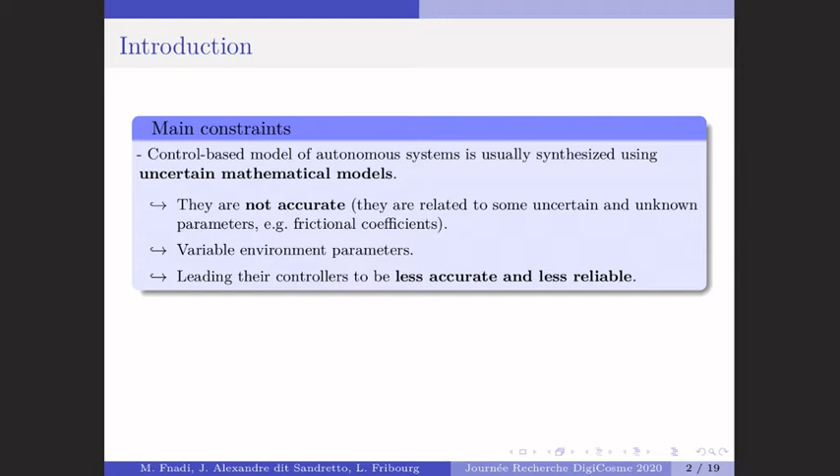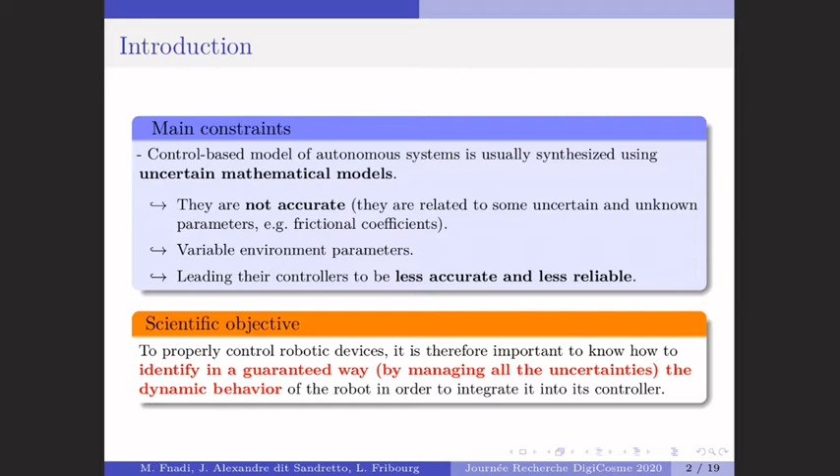So to overcome these issues, this is the purpose of my presentation today. It is important to know how to identify the dynamic model in a guaranteed way. When I say guaranteed way, it means we have to identify them as intervals instead of constant values. And once these parameters are identified, we have to use them in the control of the robots in order to achieve high accuracy and high stability of the controllers.

So in order to introduce the motivations of the postdoc project, I think this diagram can be more meaningful. Here we are interested in these two blocks, the control block of the robotic device, and the identification and observation block. The first topic that we are interested in is that we need an accurate model that requires a guaranteed identification of the parameters, mainly the dynamic parameters of the model.

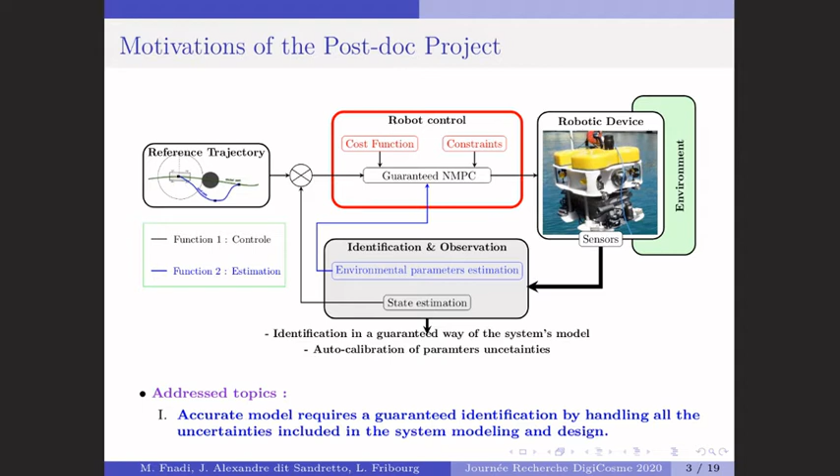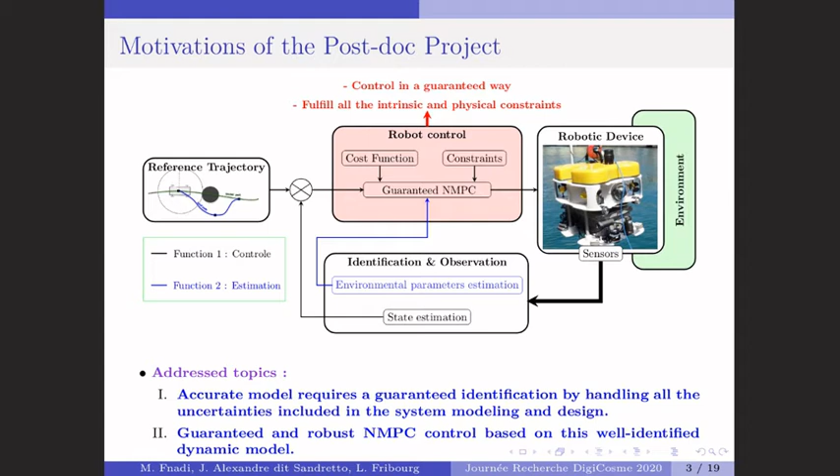These parameters are identified taking into account all the uncertainties coming from the system and the modeling as well, including the noises of the embedded sensors of the system. Once these parameters are identified, the second topic that we are interested in is the control of the robotic device. We will use mainly the parameters identified in a guaranteed way to develop a robust and guaranteed nonlinear model predictive control that optimizes some cost functions to ensure the path tracking task and to handle all the constraints of the system. So these are the main topics of this postdoc.

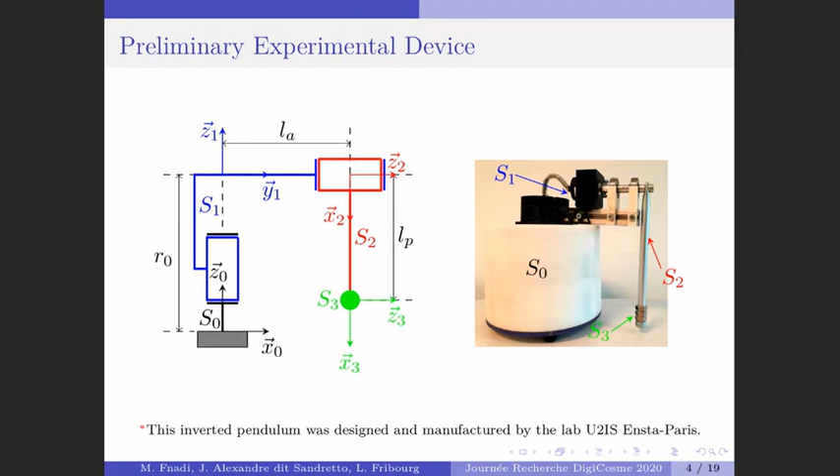So I will just introduce the experimental device. All our methods will be validated using this system, which is a simple system. It is an inverted pendulum that we have designed and manufactured in our lab. This device is equipped with a DC motor or a brushless motor to actuate the first joint, and the second joint is a passive one. And we have two encoders to measure the angle of the rotative arm and the angle of the pendulum arm. The purpose of this project is to stabilize the pendulum arm in the upright position.

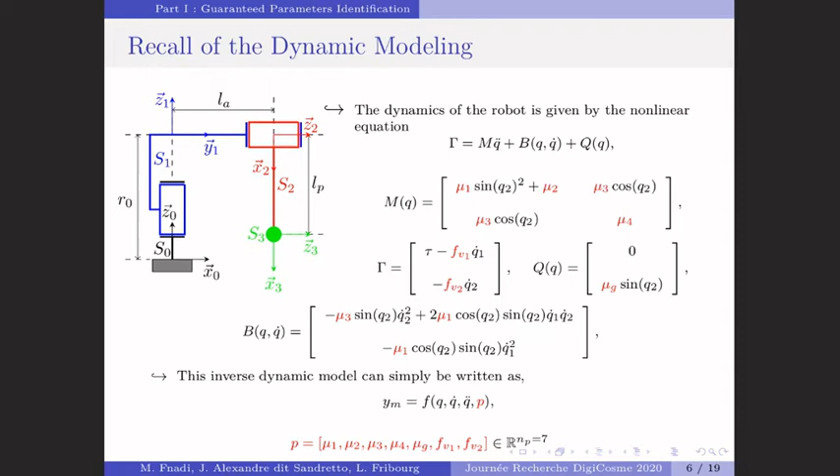So this model can be written simply by this equation, and we can notice that the inverse dynamic model can be written in a linear way according to the needed parameters. These are the parameters that we have to identify in a guaranteed way in order to achieve high accuracy and high stability of the controller.

In the first time, we have applied a traditional least square method in order to identify them. It's commonly used in robotics. So this method is based mainly on the optimization of the output, measured output and estimated output, to estimate the parameters in

a deterministic way. So here we generate some excitation trajectories in open loop that we will apply to the robot, and we can measure in real time all the parameters. So we can measure the position of the joints, and then we apply some sampling and derivative filters to compute the velocity and the acceleration of the joints.

On the other hand, we can use the inverse dynamic model to estimate the torque applied by the DC motor, and then we can generate what we call the observability matrix at each time step. And on the other hand, we can also apply this mechanical relationship that is given by the motor constructor to calculate the torque applied by the DC motor.

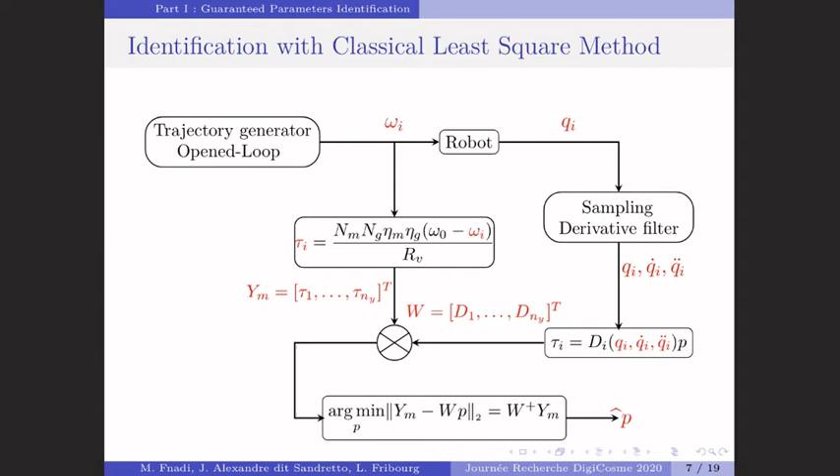So the purpose here is to optimize the error between this estimated vector and this computed vector to get the identified parameters. Nevertheless, the quality of the identification by this kind of approaches cannot be ensured. That's why a guaranteed identification using interval analysis and set inversion methods is required to reach high accuracy and high

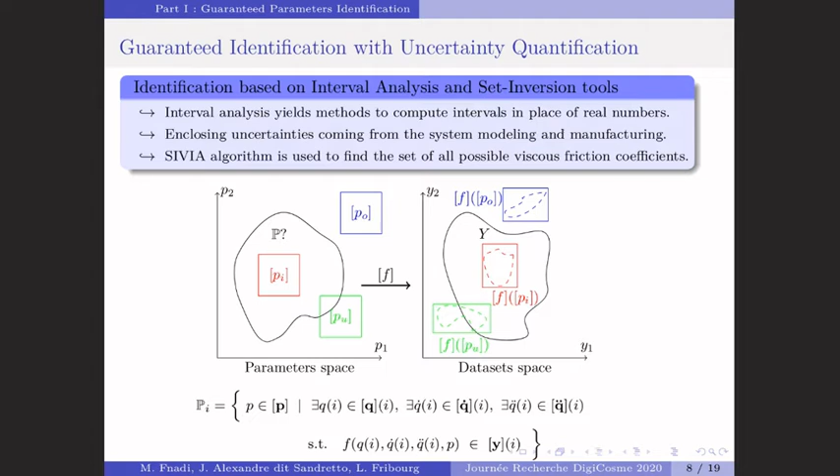And we have the undetermined ones, which are neither outside nor inside, or what we call also penumbra. And in this case, we have to bisect them in order to get small subpavings until achieving the accuracy of the SIVIA algorithm.

So this kind of problem is a set inversion problem. And the feasible parameters can be calculated by computing the reciprocal image of the output boxes that must be intersected with the initial interval of parameters, as can be seen by this equation.

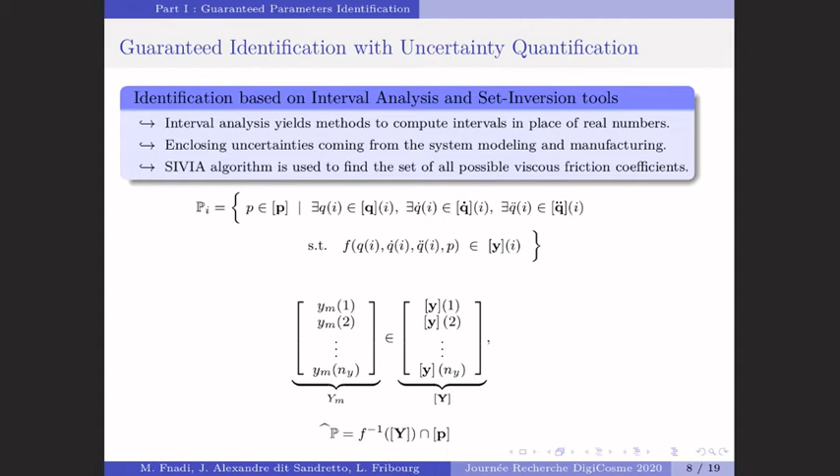Okay, so now I will introduce some results of this guaranteed identification. So we have implemented a bench strategy using the inverted pendulum to validate our identification approach. We have tested two exciting trajectories. So the first figure is the first trajectory. Here we have the angular positions that we have recorded using the inverted pendulum, and the second figure is the second trajectory. As can be seen, all the data are recorded as intervals by adding a bounded error to

each collected data. So in the table, we have the results using the least square method. So the first data are the identified data using the first trajectory, and the second are the data identified using the second trajectory. On the other hand, we can also use the CAD software. So here we use SolidWorks to deduce some geometric and inertial parameters. And we can notice that these parameters are much closer to the identified ones.

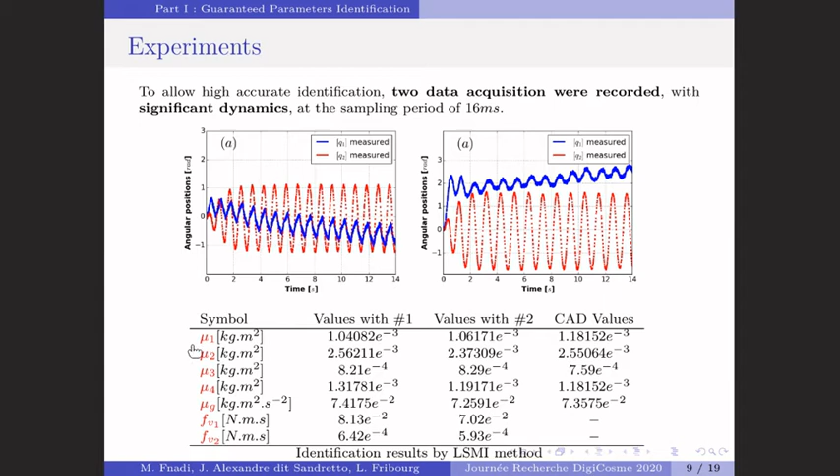And on the other hand, we have computed the mean value of each parameter, and we have quantified the uncertainties related to these 5 inertial parameters, as can be summarized by this table. Yes. So here we have the mean value of each parameter, and we have quantified the uncertainties of each one.

And on that perspective, we have applied the SIVIA algorithm, and we generate these subpavings. So the left one is the subpavings generated by the first trajectory, and the second one is the subpavings generated by the second trajectory. So the blue one is the unfeasible, the yellow one is the undetermined, and the red ones, the feasible ones.

So as can be seen, from these subpavings we can deduce this standard and common box, so the first interval is the interval of the first viscous friction parameter of the first joint, and the second one is for the second viscous parameter of the second joint.

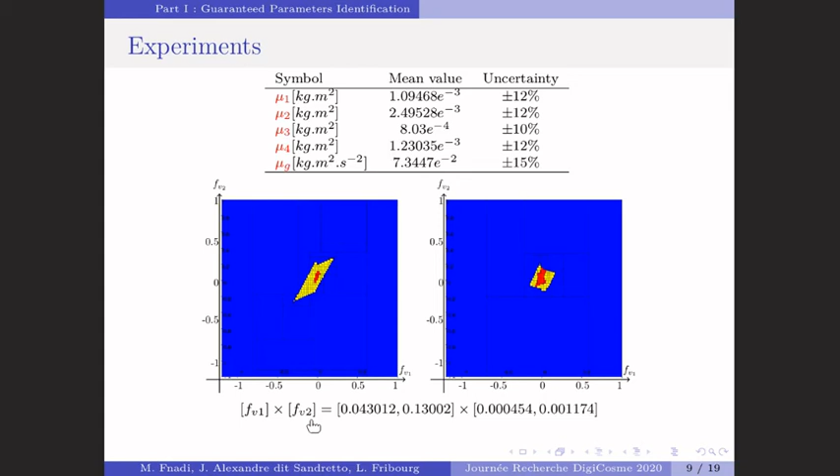So in order to show the effectiveness of our identification approach, we will apply first the cross-validation method, which is very used in robotics. And it is simple because here we compare just the measured torque with the estimated ones. So the measured one using the real system and the estimated ones using the identified parameters with the least square method and with the SIVIA parameters. And we can notice that they are similar and close. All the curves are close between them.

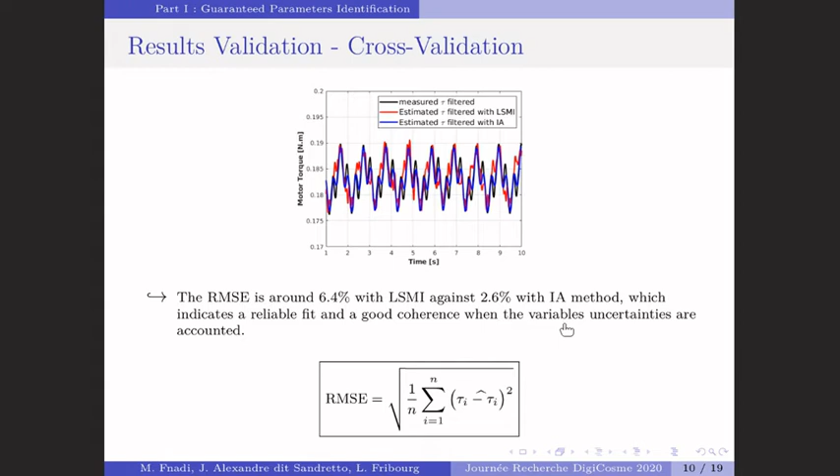And to evaluate this, we can calculate what we call the root mean square error, which is calculated by this formula. And this is around 6% with the least square parameters against 2% with the SIVIA parameters, which indicates a good fit and a good coherence when the uncertainties of the system are accounted.

On the other hand, in order also to evaluate the identification approach, we can solve this kind of ODE, the ordinary differential equation. So our dynamic model can be written as a direct dynamic model by this high order ordinary differential equation with respect to these initial conditions. So here we have the state and the initial state which belongs to this box, and we have also the initial input which belongs to this box.

So since the function f is Lipschitz and continuous in state and input, this ODE admits a unique solution at each time step. And in order to solve this ODE, we can use the DynIBEX library. I will explain the principle of DynIBEX. So DynIBEX allows us to compute the solution of this equation as boxes.

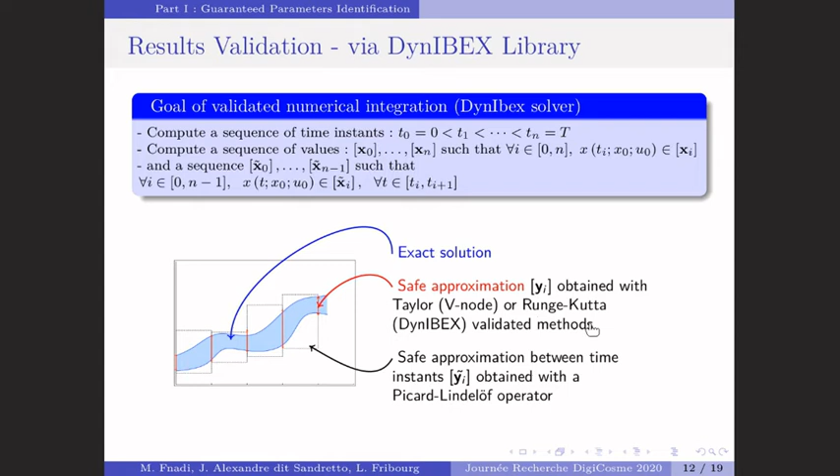So here we have the sequence of time instants as inputs, and we have also the sequence of the state. For each state variable, we can get the interval of inclusion. And this approach is based mainly on the Runge-Kutta schemes, which are powerful numerical integration methods. And we use this to solve our direct dynamic model, and we got these results.

So we did these tests for many scenarios. I will show you just two scenarios. So this one is the guaranteed simulation using these initial conditions, and the second one is with these other initial conditions. So here we compare the measurements using the real system with the simulated ones using the least square parameters and the SIVIA parameters. So as we can see, the measurements of the real system are very close to the simulated model.

And to evaluate this, we can use what we call coverage rates that can be calculated using this formula, where Nq is the number of times when the measured data is included in the simulated boxes. And this test is very draconian, and it's not easy to evaluate because of the timing lag and the synchronization between the simulation and the experiments. This explains the small percentages of inclusion between the simulation and the experiments.

Nevertheless, we can see that the percentages are more important when the SIVIA parameters are used compared with the least square parameters. And this is due to the fact that all the SIVIA parameters are considered as intervals instead of real numbers.

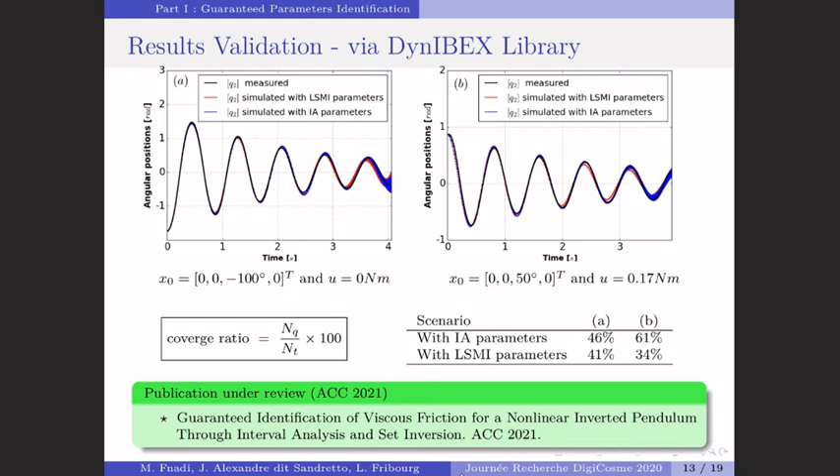So now I will present the second part, which is based on the first part. I will use the guaranteed identified parameters to develop my guaranteed nonlinear model predictive control. So nonlinear model predictive control is a very powerful technique that is commonly used in robotics and also in chemical processes because of its ability to handle constraints and also to anticipate future changes in set point and in reference trajectory.

So the principle here of the NMPC is to predict the dynamic behavior of the system along the prediction horizon. So the prediction horizon is the number of sampling times of the control signal multiplied by the sampling period of this signal.

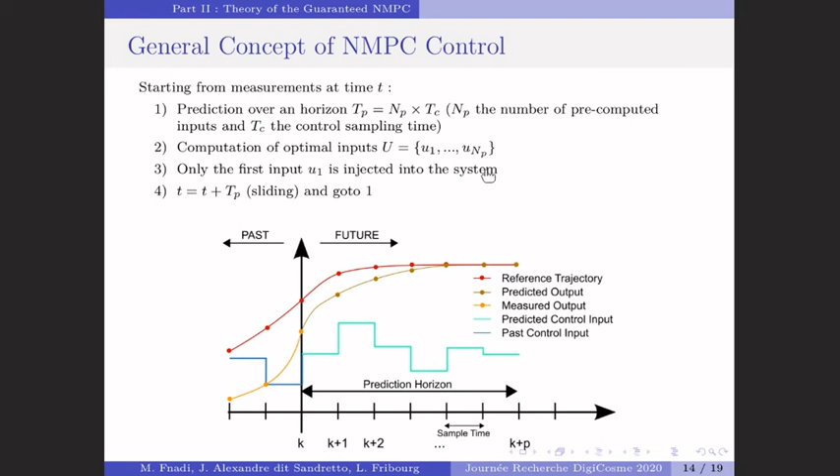And the purpose here is to compute the optimal inputs at each time step. And then we inject the first input into the system, that is optimal and smooth and respects all the constraints of the system. So the NMPC approach is based mainly on the optimization problem that minimizes some cost function that can be expressed carefully and that respects the system constraints, mainly the input saturations and also the state limits.

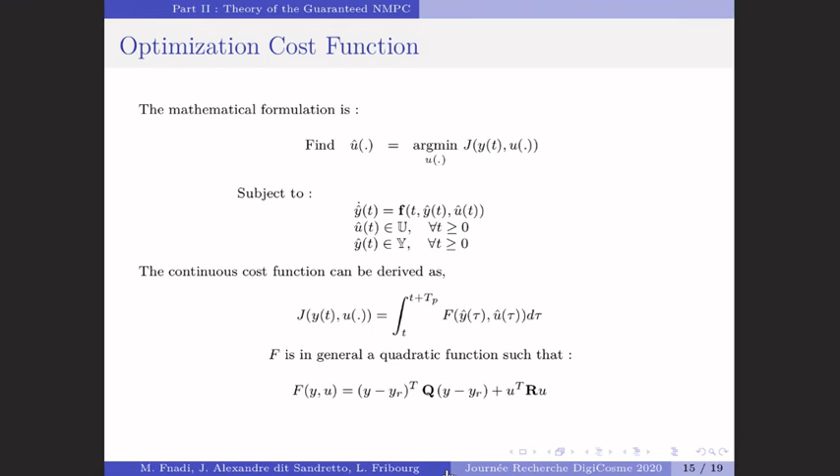Okay, so the continuous cost function can be expressed using this integral along the prediction horizon of this quadratic form that minimizes the norm of the difference between the predicted output and the reference output, and also the norm of the input vector, taking into account the weighting matrices Q and R that must be adjusted adequately. So in order to use the numerical simulation, we have to express this cost function in a discrete form.

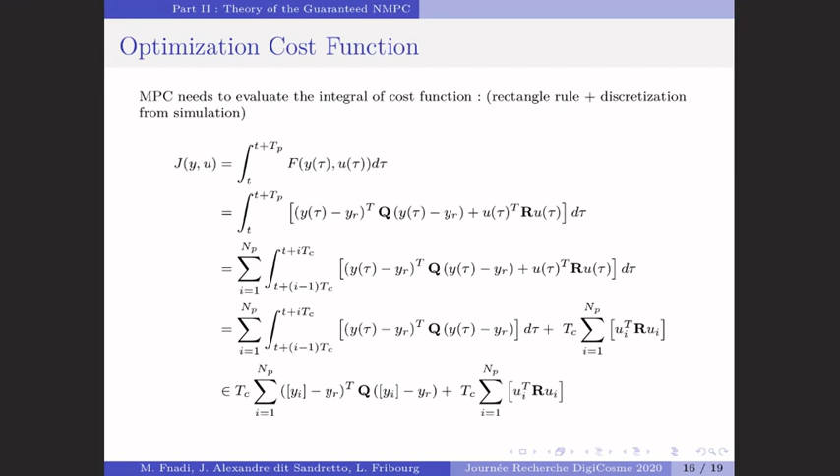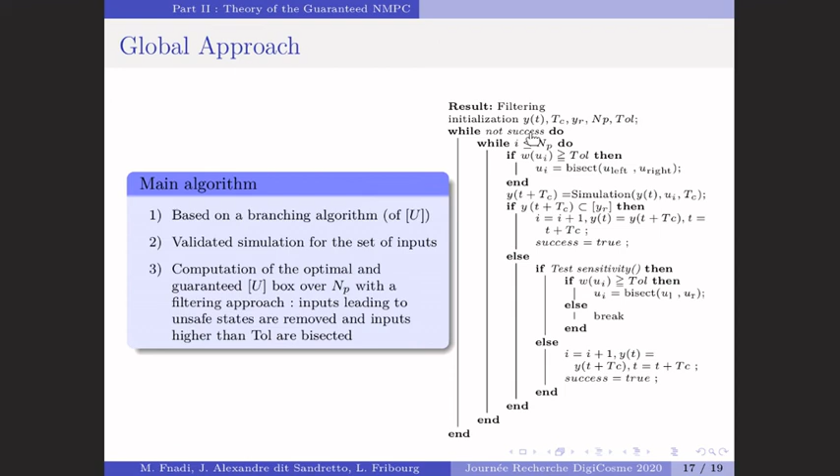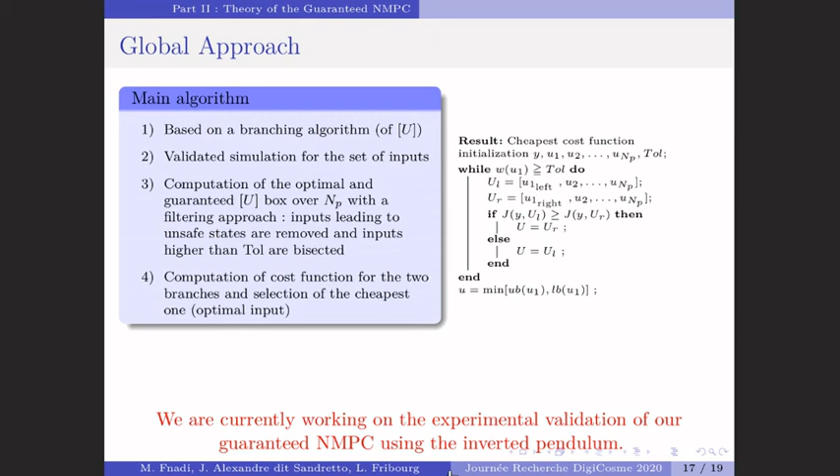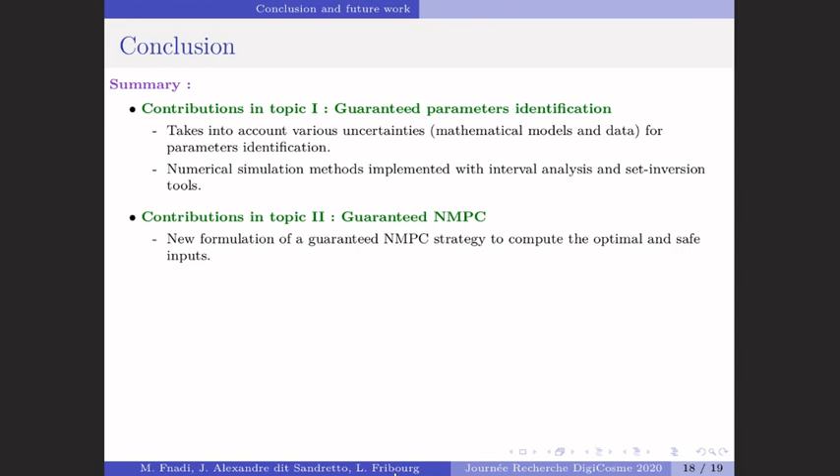As future work, we are currently working on the experimental validation of the nonlinear model predictive control using the inverted pendulum, which will also be applied to another, more complex kind of system, such as the underwater robot available in our lab. This kind of robot also requires online estimation and self-calibration of some parameters, mainly environmental parameters such as the hydrodynamic coefficients.